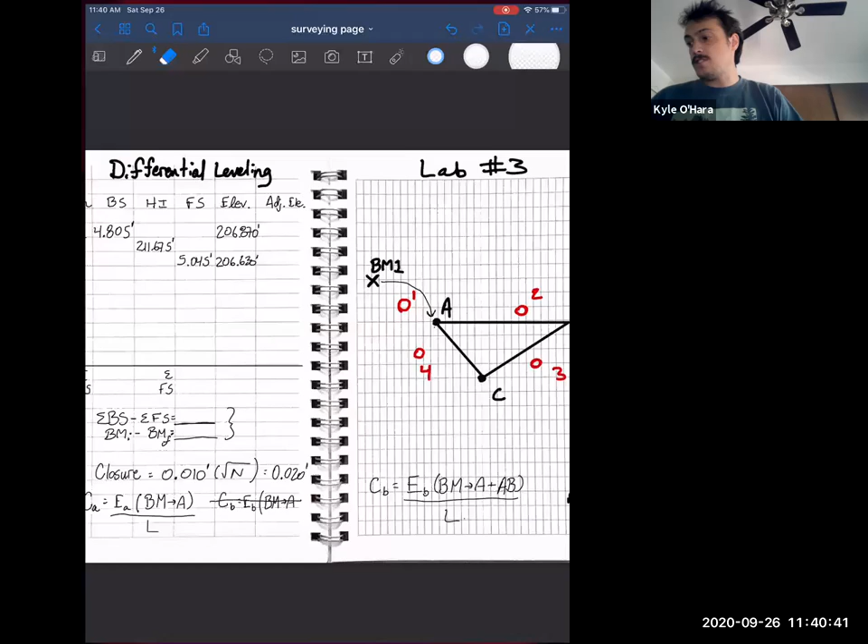We are recording for differential leveling. And I'm going to pull up the lab book. Great. So we're using the exact same traverse, A, B, and C.

I'm going to leave it up to you to fill out all of the other necessary requirements for the right-hand side of the page. And one thing that I forgot to do on our last one is after you do all of your calculations, you double check your precisions and everything is good. You're just going to come down here. This is after you do everything and you double check it and throw your signature on the bottom right-hand corner. So do that at the end, not the beginning.

All right, differential leveling. So let's just start out with any general questions about differential leveling. All right, there's no general questions.

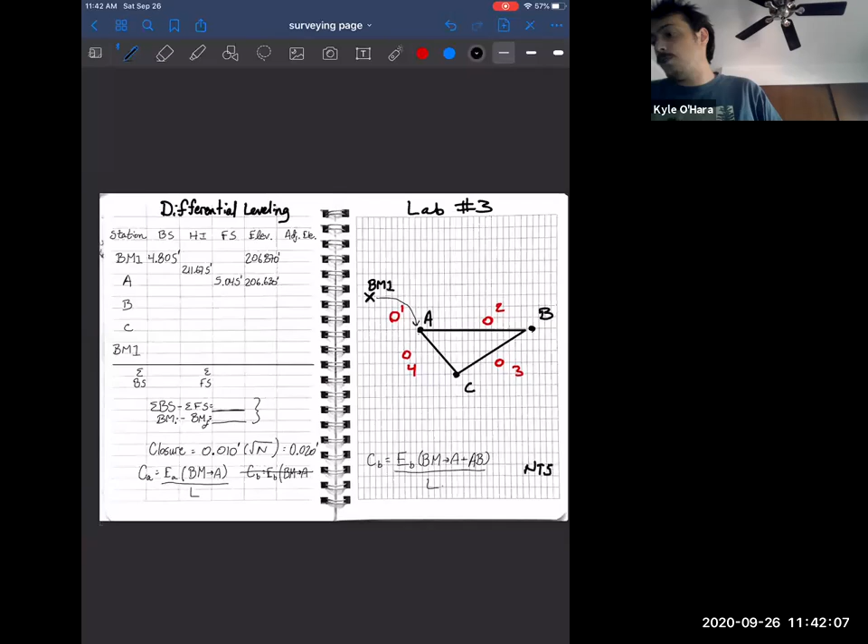Marcin, you have a suggestion of going through what's actually being input to the calculator. I do not have a connection cable to show my actual calculator steps. I'm trying to write out, when I go through the calculations, explicitly what I put in the calculator, or written steps of what I'm doing. I'll look into actually doing a little screen calculator. I believe they have those. So I'll try to include that for next lab. That's a good point.

All right. So differential leveling, here we are. Same traverse as we just did with our steel tape, but now we want to figure out the vertical elevations. Now what we've added here that we didn't have before is a benchmark. This benchmark was found looking at some plans from when they built the Cabrillo library. And it's actually pretty close to our traverse.

And the elevation of our benchmark, we're going to report on our right-hand side under elevation, under station BM1. And that is 206.870.

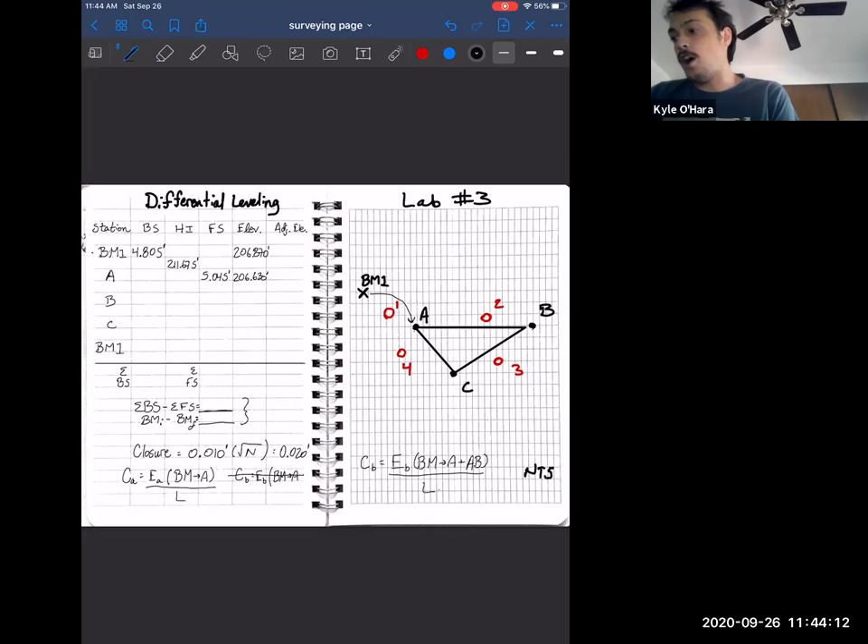Some labs don't have as clear of a setup. You don't know exactly the steps you're going to be going through, but differential leveling always has these 6 columns, which is probably why field books were designed this way: station, backsight, height of instrument, foresight, elevation, and adjusted elevation. So make sure you have all 6 of those columns.

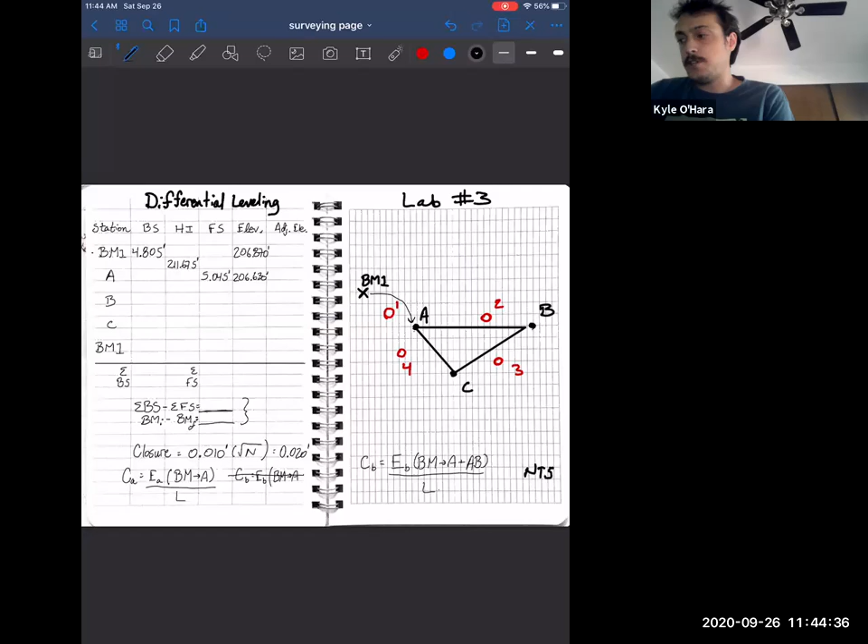And we know that we're going to be shooting our different stations on a traverse. So the traverse is going in a circle, with the start and end station being the same. So we can set it up as benchmark 1, then A, B, C, and benchmark 1 again.

Now, I know that there were only 4 setups in this particular experiment, but normally you wouldn't necessarily want to write all of your stations at first, because if there was a tree in the way, let's say that I was at setup 4 and there was a big tree between 4 and benchmark 1, I would have to do a turning point to get around that tree, and that would introduce an additional row between C and benchmark 1.

All right, so let's just get to the calculations. I went through one of these calculations in the videos. I'm happy to go over this particular one again, or I can go straight to setup 2. What I have written here on the page was the math that I did in the videos, and that would be for setup 1, which is between benchmark 1 and A. So I was planning on starting at setup 2 for these calculations. Does that work for everyone, or do you want me to go through?

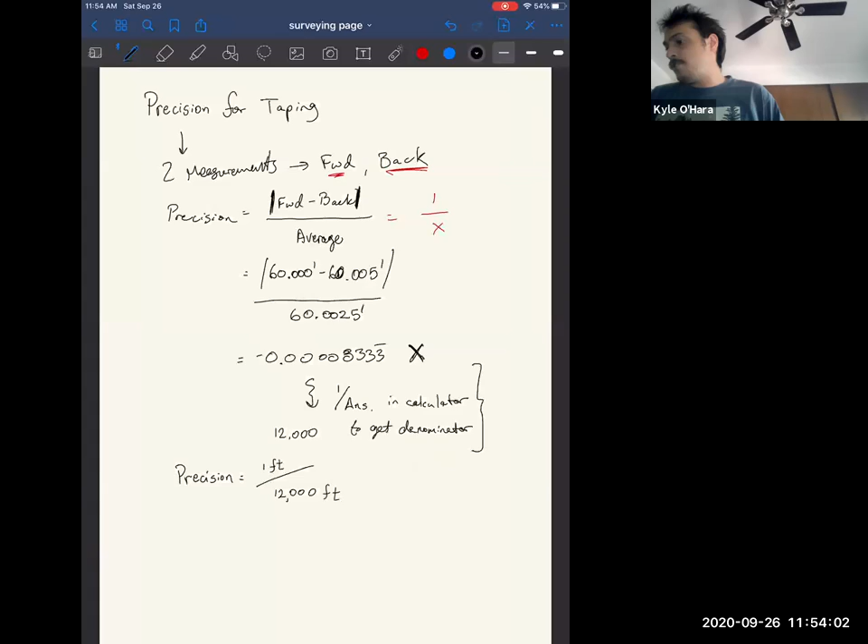This is a great opportunity to draw a schematic, and I am also a visual person a lot of times. So let's just go through this little side view. So A to B, there's not really that much elevation change, but for the sake of it, let's draw it like this. So here's point A, and that has an elevation of 206.630 feet. And we're trying to figure out the elevation at B.

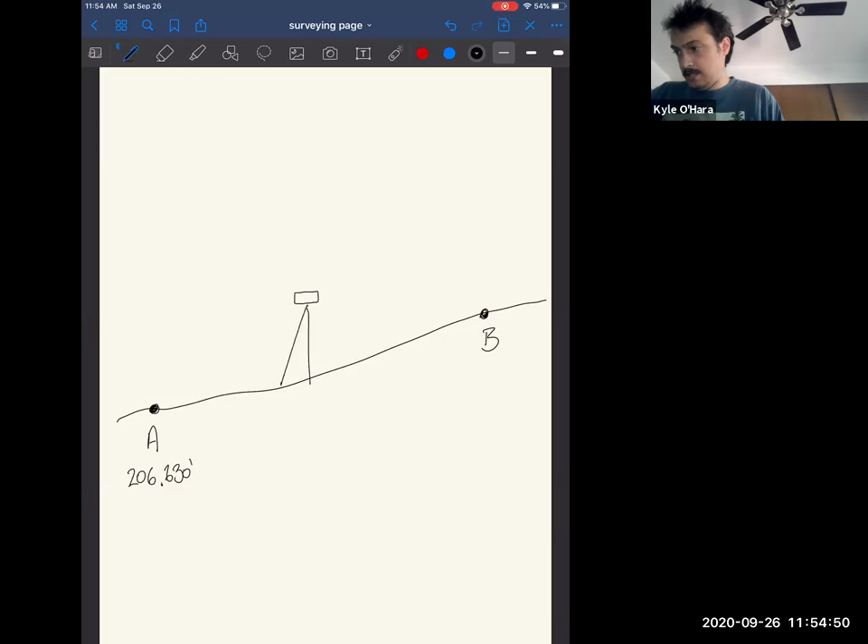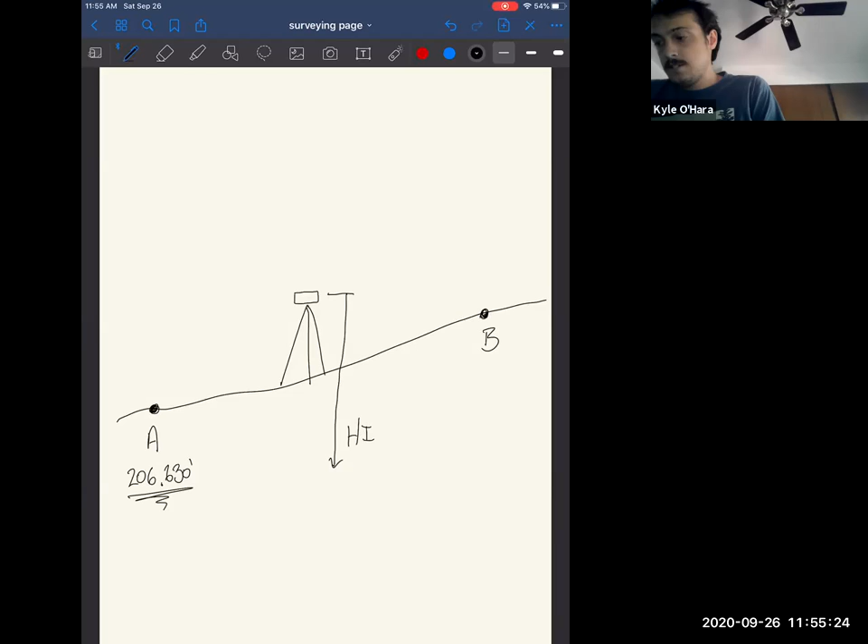And we have our instrument that has some height above mean sea level. So what we're doing here is the profile view. I like to think of it as we're transferring an elevation. We're taking this elevation at A and we're using some readings in order to move that elevation to B. So how does that occur?

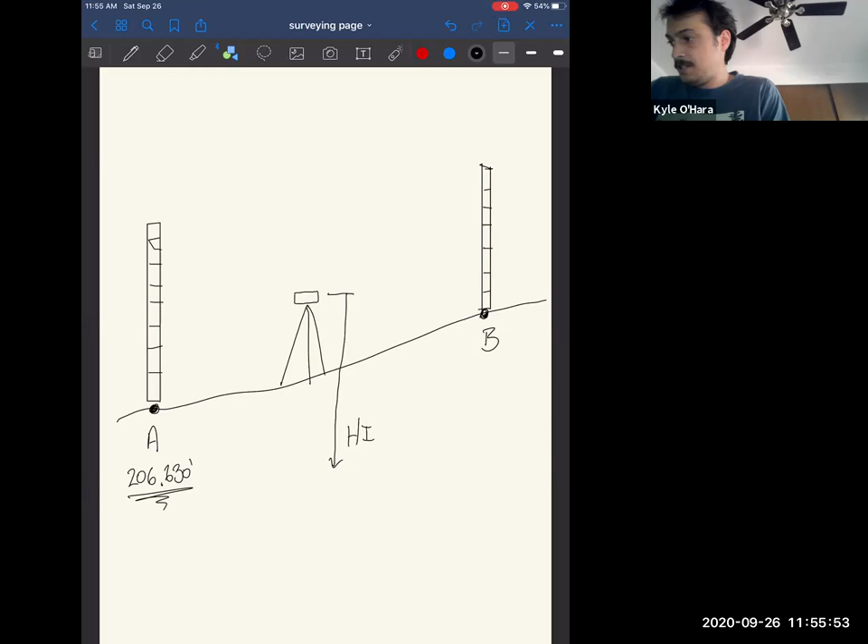We take our rod at A. We have a bunch of readings. And then we take the rod to B. And what are those readings physically? Well, they're like this. Our back sight is here. And we're just reading some elevation off the rod. So this is our back sight. So really that label should just be there. That's our back sight reading.

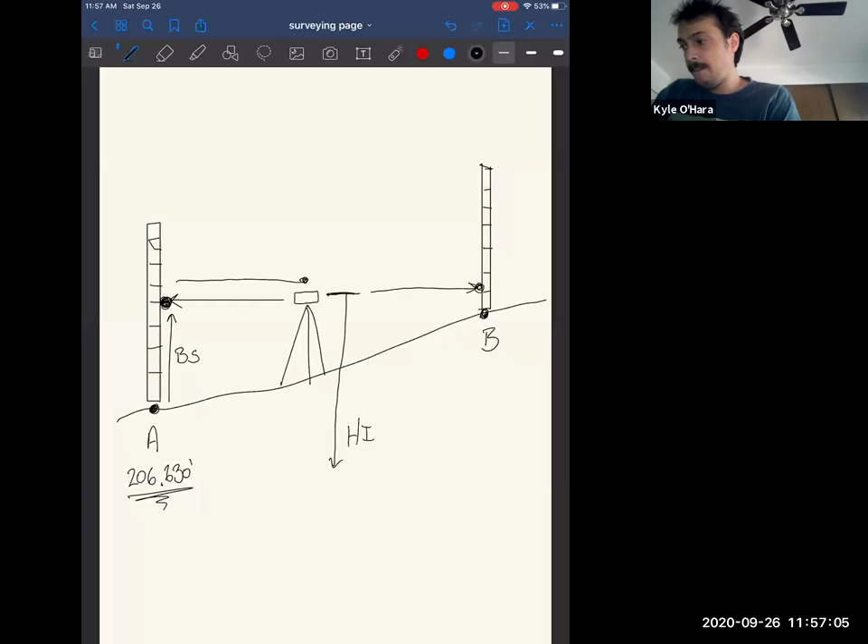It's just that point on our rod. So all we're doing is we're moving that elevation up the rod, transferring it across to our instrument. We're just adding it to the elevation at A. A plus back sight is the height of the instrument, right? Now we're going to turn our entire setup around and move that elevation to point B. How do we do that? We take a reading on the rod, and that is our foresight. Now, that foresight needs to get moved down the rod to point B, and that is our elevation at B.

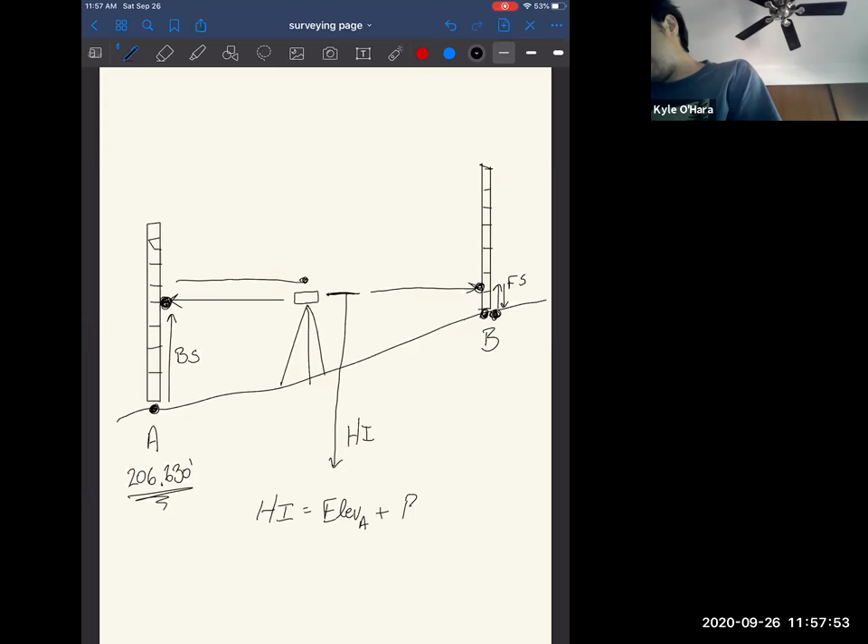So mathematically, what does that look like? That means that our height of instrument in this case is elevation at A plus the back sight, and then our elevation at B is just equal to the height of the instrument minus the foresight. Is this generally helpful to everyone to see it like this, to see the geometry of the thing? Great. Excellent.

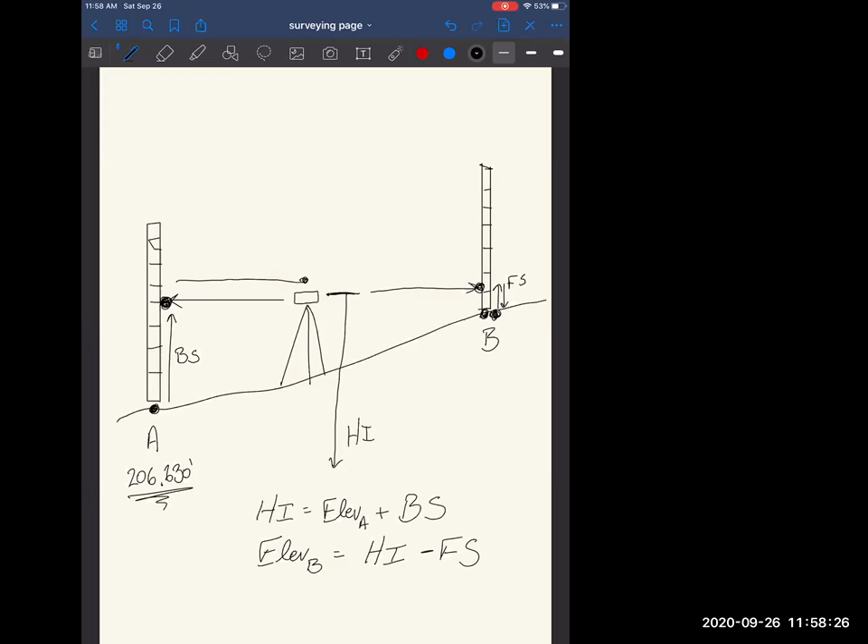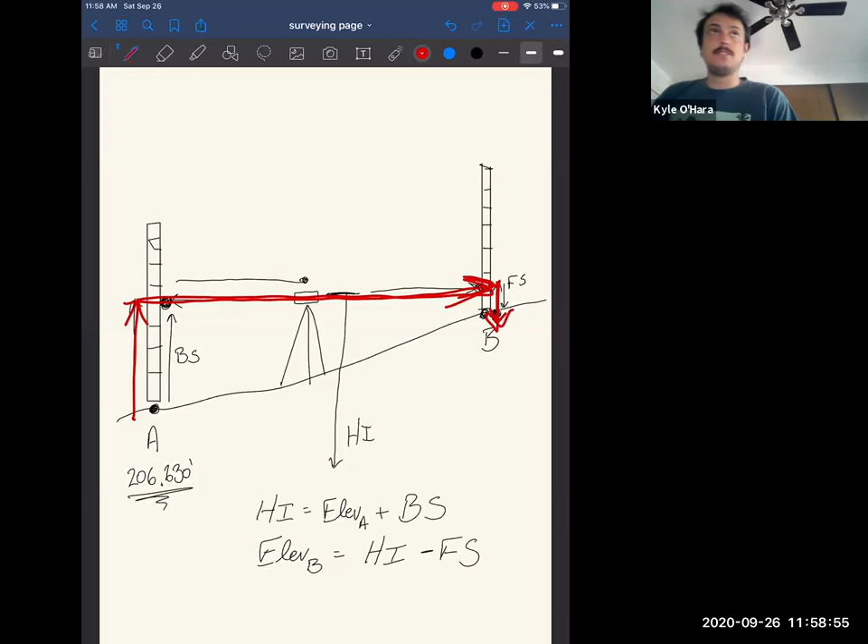So I think about it like physically what's happening is we're taking a rod reading, we're moving an elevation up, we're transferring it across through the instrument, and then we're using a reading in order to bring that elevation back down. So it's like up, across, down. Cool.

And that's kind of why we set up the field book in this way. It's trying to give us, like in a table, a physical idea of what we're actually doing. Great. So that's the data for B, from A to B. So that'd be setup 2. So let's move to setup 3.

We set up at 3, we do all the necessary things, and we turn our instrument around. If we're sitting here at station 3, what point are we gonna take our back sight from? To B? To B, exactly. And that back sight is 4.589 feet. Turn the instrument around. Take our foresight to C, which is 7.361 feet. Can someone do the math to tell me the height of the instrument?

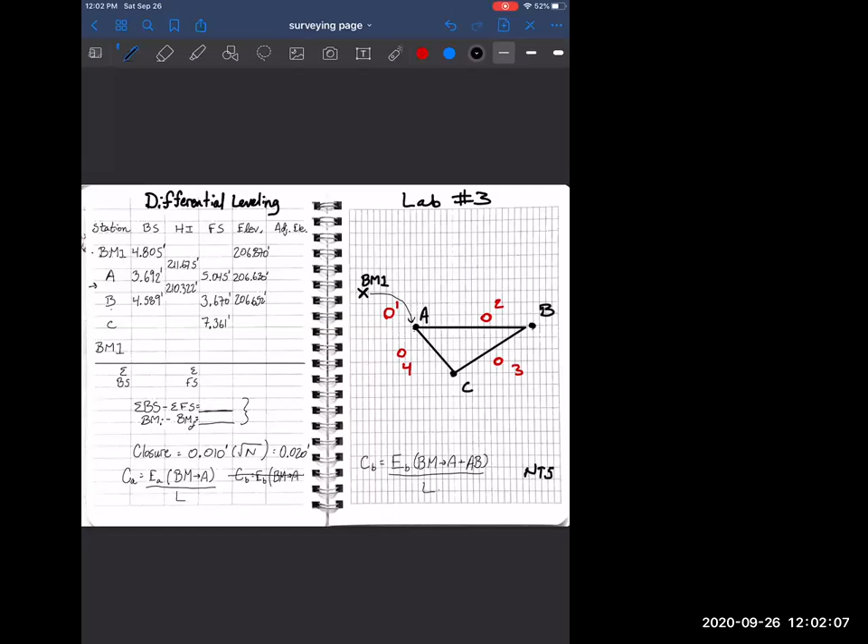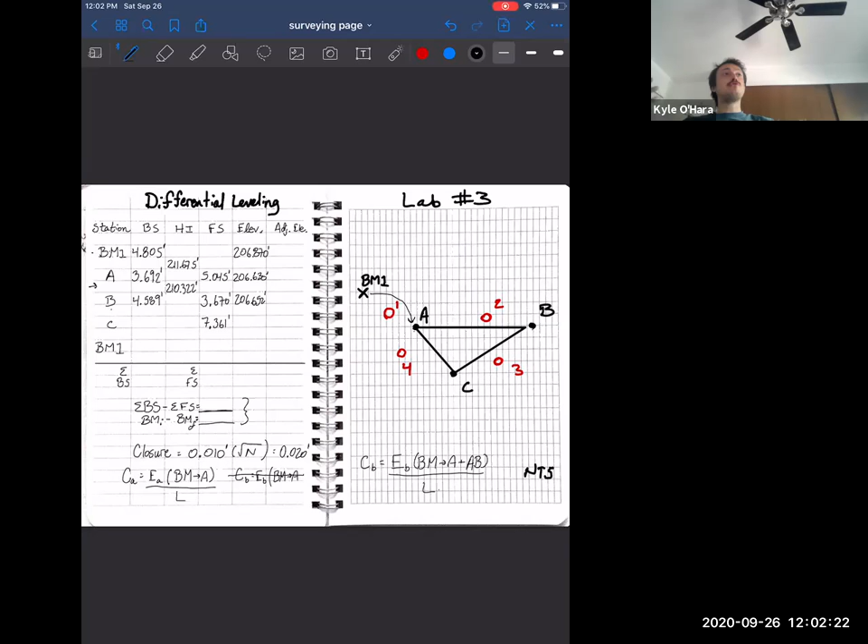So this would be one of the cases where I would say you can't just use whatever math you want. Differential leveling is a very prescriptive activity. All right. Oops. Gosh dang it.

Okay. So someone mentioned in the chat our elevation, 211.241. Exactly, which gives us an elevation of what at C? 203.880. Don't forget that last data point. All right. So from C, that's it. We have A, B, and C. What do we need to do to complete our traverse? We need to get back to the benchmark. And hopefully it is the exact same value as what we started with.

So we're going to set up at 4, and we're going to take a back sight to C. And we're going to turn the instrument around and take a foresight to the benchmark. We were very careful in how we set things up for our lab, so we knew that we would have a clear sight from C to the benchmark. But a lot of times you'd actually have to do another setup turning point to get from C to benchmark 1.

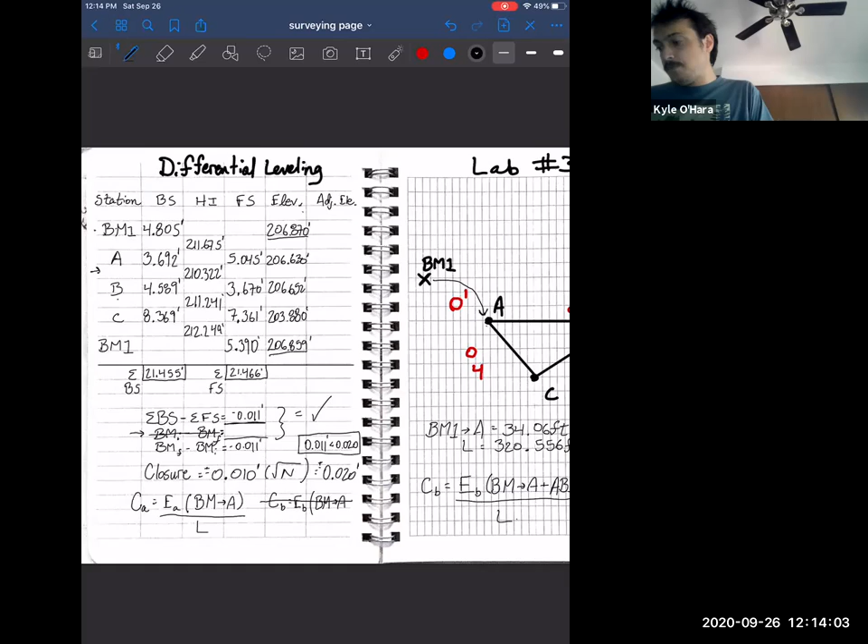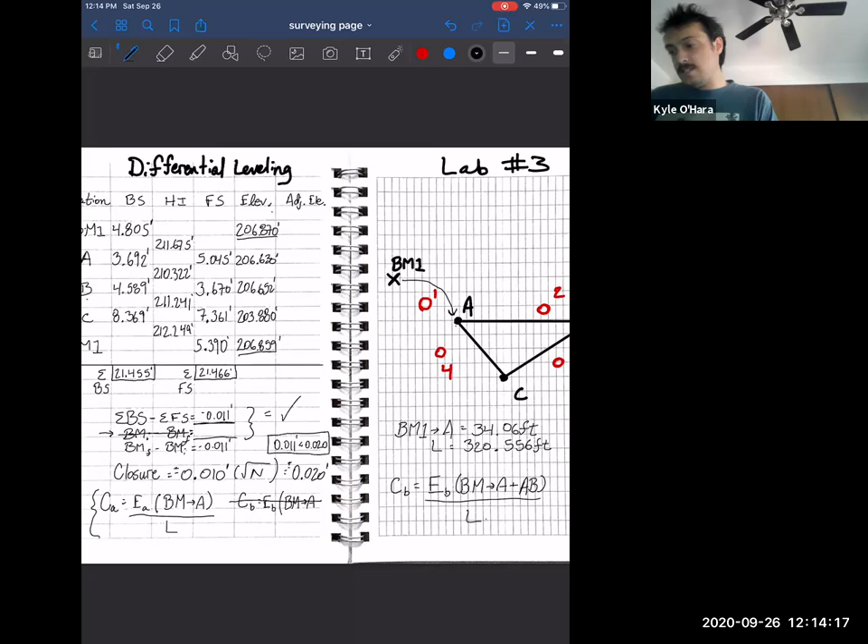So the adjustment that you give, for example, to point A is equal to this equation. So let's break this equation out a little bit farther on a new page. That is equal to E times benchmark to A over length of circuit, where E is equal to closure error. In this case, negative 0.011 feet.

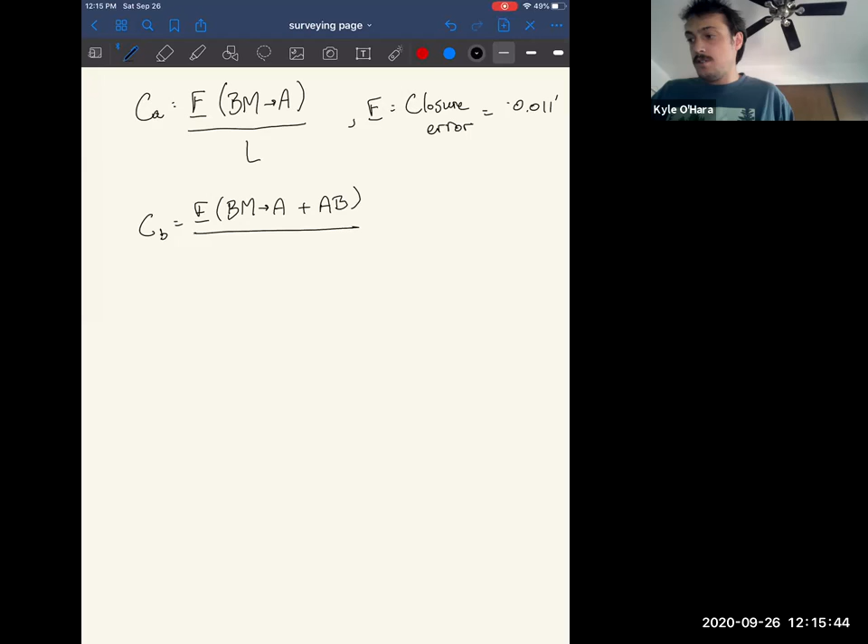Now, our adjustment to point B is just equal to that closure error times benchmark to A plus A to B, over L. So let's just look at this first case and do the math for it. So our error is negative 0.011 feet. Benchmark to A, 34.06 feet. And the length of our circuit,

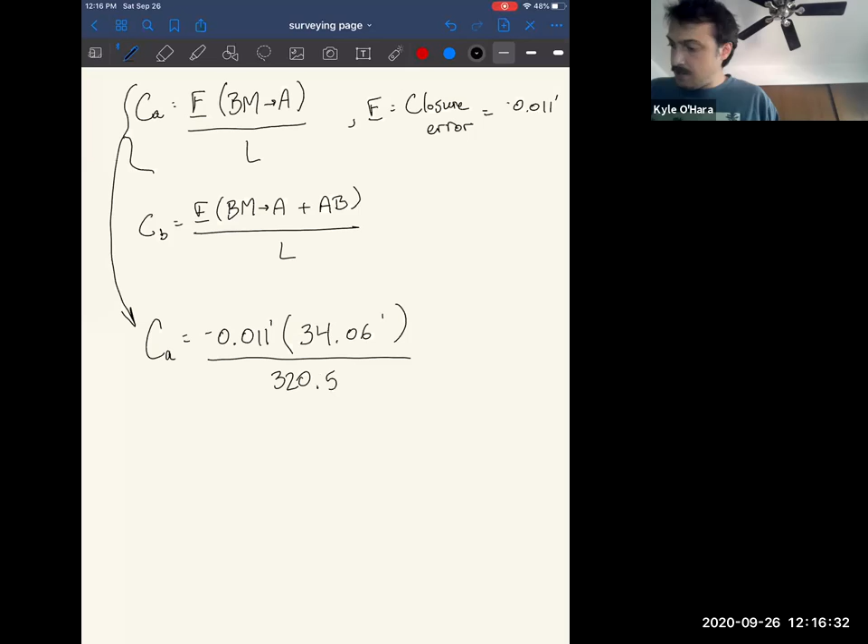320.556 feet. So someone could plug that into their calculators and tell me what that is.

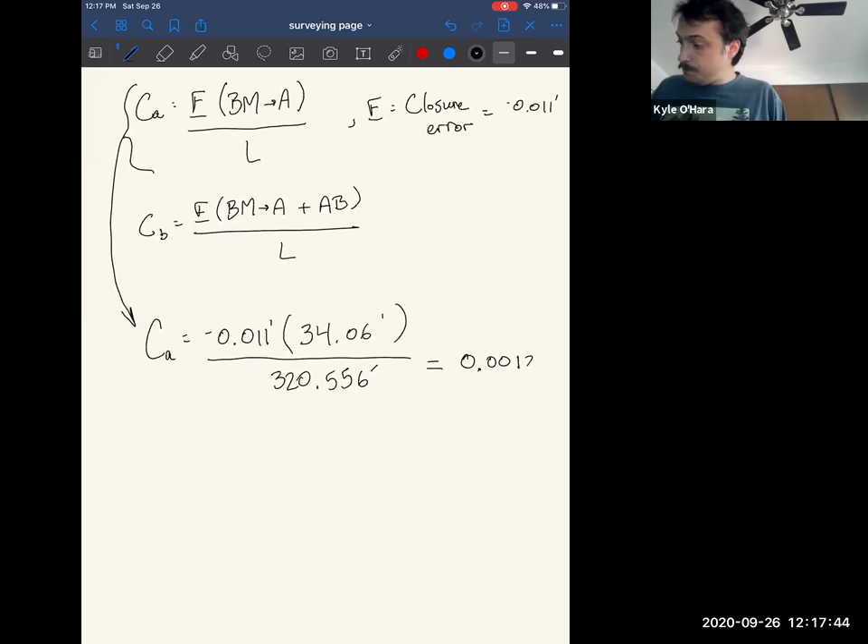All right, and some answers rolling in, and they all look to be what I got. And that is, in this case, negative. So here's the trick for this: since we ended lower than our actual elevation, we have to add in order to get our adjusted elevation. So this negative means that we were lower than expected.

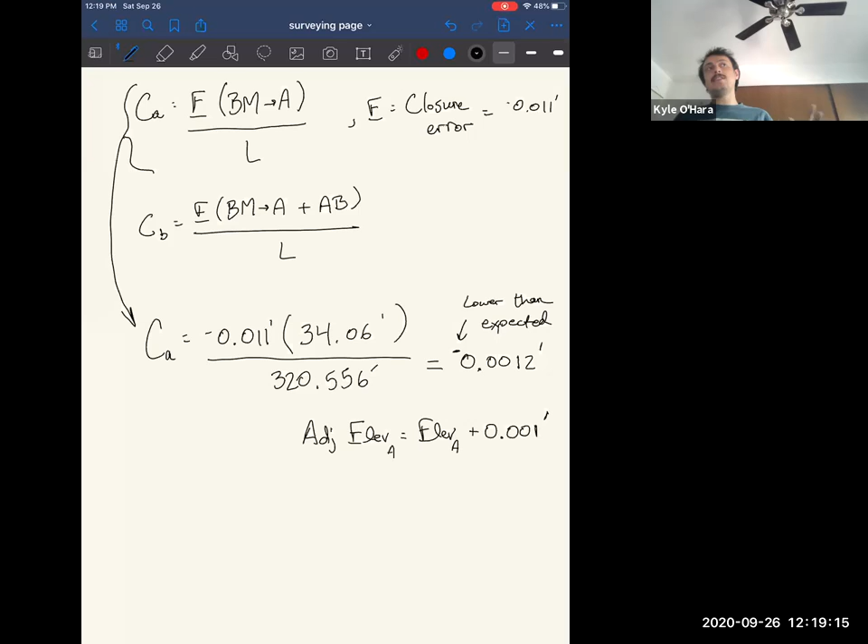So our adjusted elevation at A is just equal to elevation at A plus 0.001. In this case, we can only go to the thousandths of a foot. It feels a little arbitrary, and it's because it is a little bit arbitrary.

So without doing any math, this is a no math question. What would be our adjusted elevation at our benchmark final? So think about what we're doing here. Look at this equation where we're saying error times the ratio of how far we've gone in the circuit to the total circuit.

So same for B. We're just multiplying that error by the ratio of how far we've gone in the circuit over the total circuit. Where did I get benchmark to A? I don't remember. I either paced it or I got a piece of steel tape and just did a quick measurement. It's just something you would do in the field.

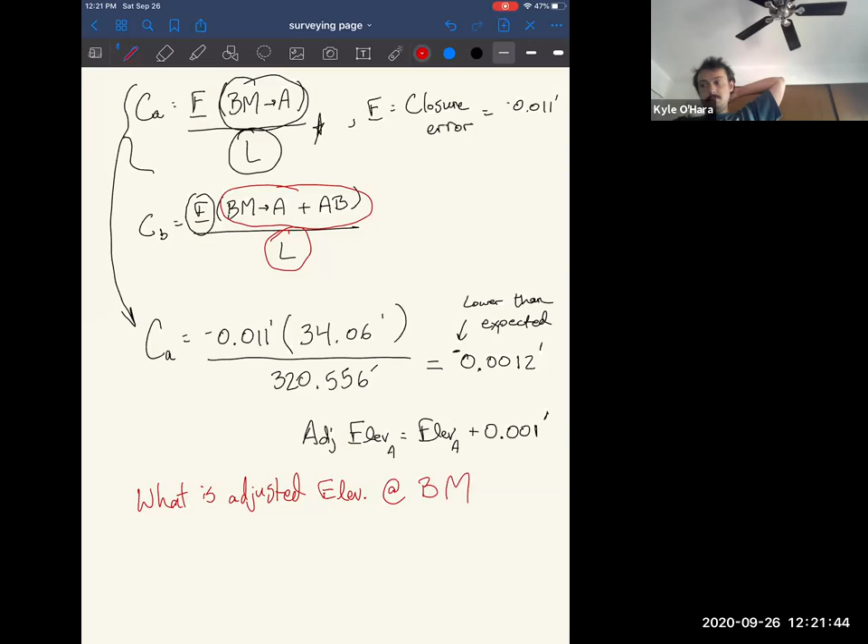So yeah, benchmark to benchmark. So the benchmark is the same. Exactly. Just equal to BM initial. And mathematically, why does that make sense?

So C to BM final, that's just the error times benchmark to A, A to B, B to C, C to benchmark, over the total length of the circuit. Well, the numerator is the length of the circuit. So this is 1, which means that we are giving all of the error across the entire traverse to our benchmark final. So that is our mathematical check for our adjusted elevations.

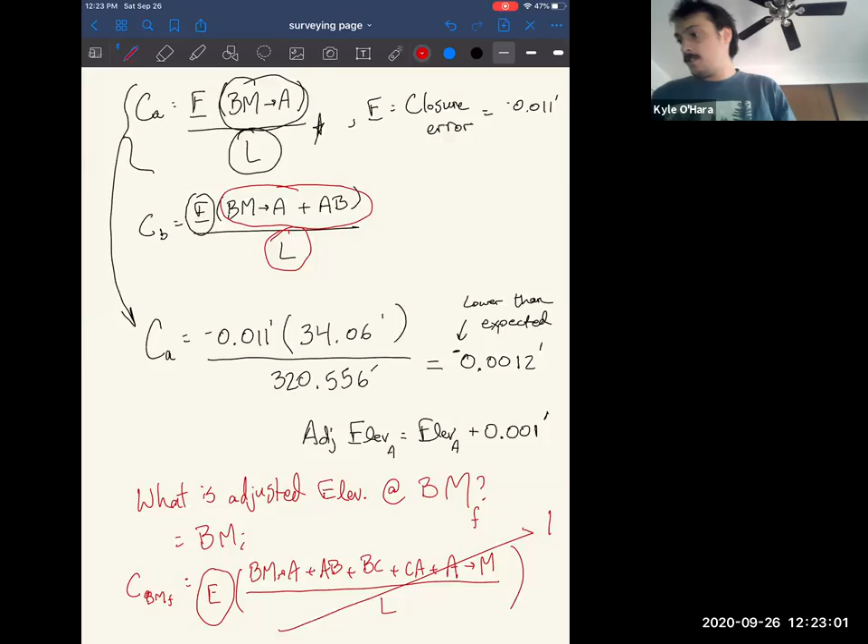That is, our adjusted elevation at benchmark 1 has to be 206.8708. And let's just write one down because we just did. A, that was 206.6318. And that's it. So I'm going to leave the last two calculations for the adjustment of B and C for all of you to do.